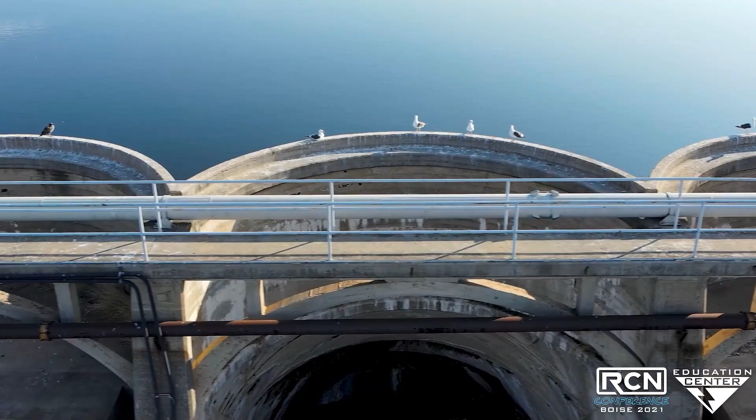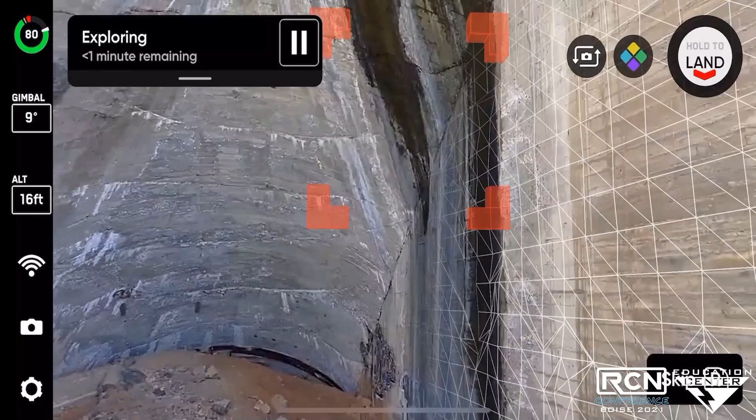The scope of the project was to create a digital twin or reality mesh to complement 3D model where we're going to leverage AI. So we took the orthomosaic imagery that we had from the reality mesh, popped it into Neurala Brain Builder, which is through a web portal. How many of those different assets there are within that 45 square mile. So it gave us a count, it gave us an understanding.

Well, you could probably guess if you do no remediation that the predictive analytics on it is going to be 3 centimeter growth if nothing changes. And at the end of the day, we're just looking to continue to build the group of users that work with this type of technology, right? Get them more familiar, get them more excited, and make this more part of the day-to-day work that we all do.

Today's presentation is going to be on leveraging reality captured data to solve tomorrow's infrastructure challenges. My name is Carlos Femmer. I'm the Director of Data Acquisition with HDR Engineering. And hi, I'm Cameron Schaefer. I'm our Transportation, Data Acquisition, and Reality Mesh Director.

So we have one slide on HDR Engineering. It's been around for 100 years. Established in 1917, 40 plus countries, roughly about 10,000 employees, 200 plus offices worldwide. Within the data acquisition practice, we have about 125 data acquisition professionals. In 2020, we completed about 568 projects.

And from a core offering, we have artificial intelligence, survey, drones, LiDAR, geophysics. So when we talk about reality capture, the ability to bring in a lot of these sensors, we're going to look at a few project examples. It's pretty beneficial. The first project example that we're going to talk about is Diablo Dam. This is for Seattle City Light up in North Cascades National Park.

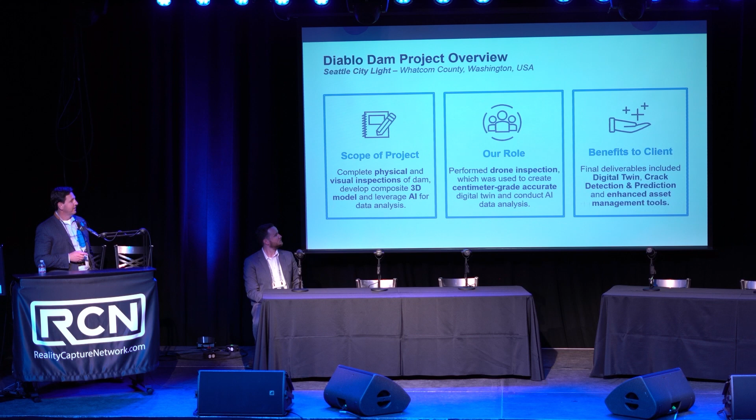Our role was to perform drone inspection used to create centimeter grade accuracy and then use AI for data analysis. And then benefits to the client or final deliverables were digital twin, crack detection, prediction, and enhanced asset management tools.

So if we look at the execution for the project, it's broken down typically into 4 phases. The first phase is inspection or the data capture. We use drones. First we got the survey control from the client. We set up on their survey control, set out ground control points from there, and then did a particular capture technique for that specific dam, because each asset requires a different capture technique to get it the right way.

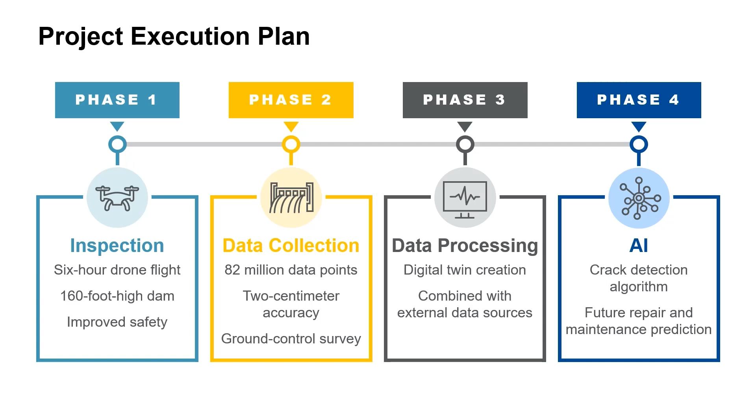The second part was data collection. We ended up with 82 million points, 2 centimeter accuracy of what's stated. It's actually tighter than that. And then ground control. Data processing, we created the digital twin with Bentley's ContextCapture, which is an amazing software piece. And then lastly, we developed some AI to do some crack detection, and it helps out with future repair and maintenance as well.

So the whole goal was to create a living, breathing model, and the first part is high-resolution photography. The next project we'll talk about is where we brought LiDAR in, but in this particular one, we didn't have it. So you have high-resolution photography that's overlapped both side and front to produce the reality mesh and digital twin.

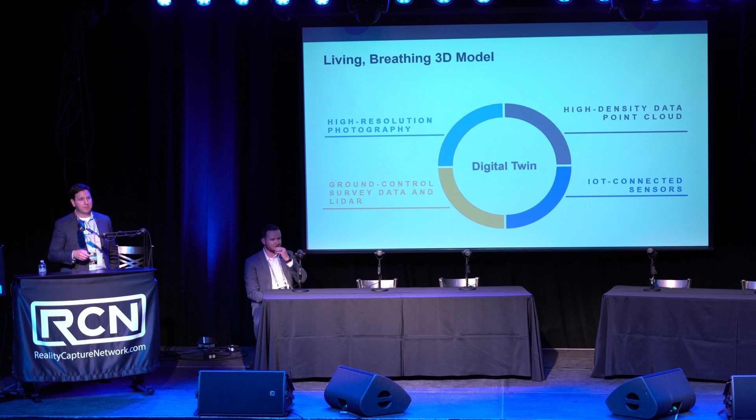The second is the ground control, survey data, and LiDAR. The point cloud, and then in the future, where you can throw in other sensors is where things are going. If you have a baseline and you're adding that same capture year over year, or at whatever cadence is appropriate, some assets might be 2 years, some assets might be every 5 years. Then you add in other connected sensors, that's where you bring a lot of things together.

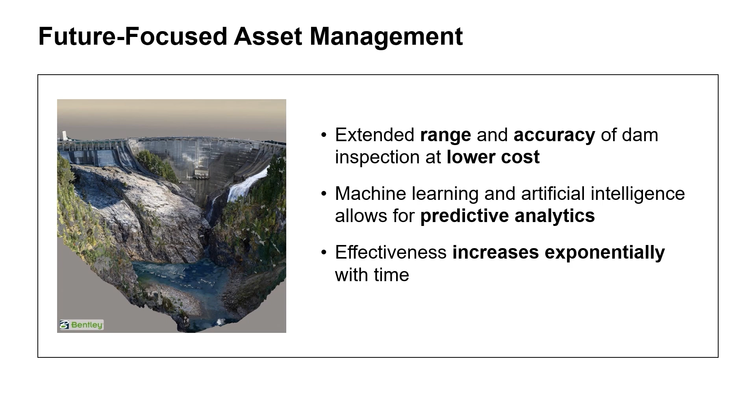So the focus and future is on asset management, extending the range and accuracy at a lower cost. To state up front, we did the rope inspection, but this is a complement. This isn't a replacement for what a rope inspector would do. You can't bang on things with the drone, but what you can do is get a good complement as a tool to a rope inspector where appropriate.

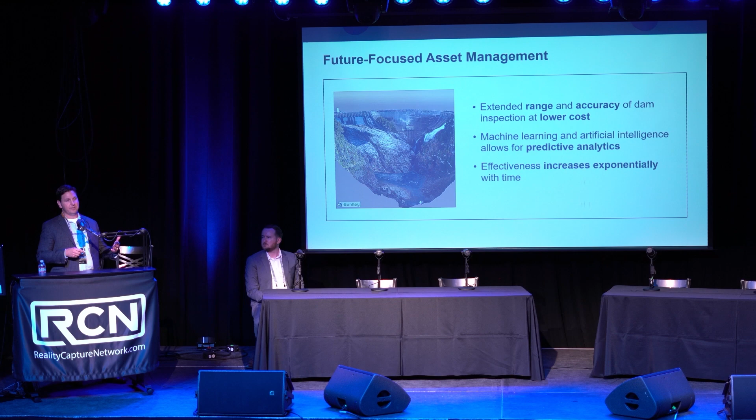If it's just a visual inspection, then it's the right tool for sure. Machine learning and AI, we're going to talk about that shortly too, and the effectiveness increases exponentially with time. And we'll talk about that in a second as well. But a good example is, year 1 you capture it, you see a crack. Year 3 you capture it, and that crack extended by 5 centimeters. And then year 6 you capture it, and it's 9.2. Well, you can probably guess if you do no remediation that the predictive analytics on it is going to be somewhere at 3 centimeter growth if nothing changes.

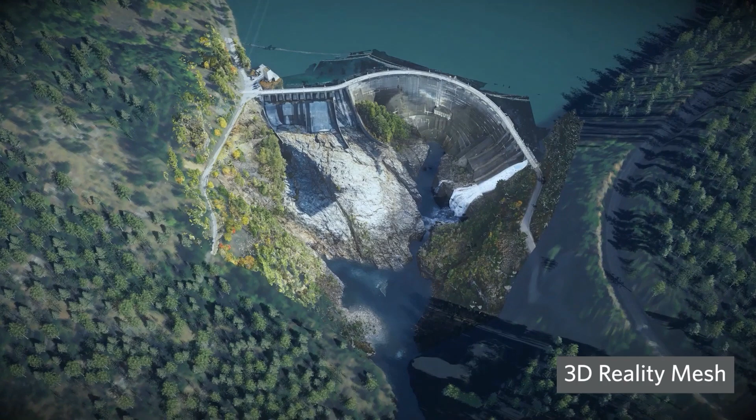But it starts with, so here's an example where we took the dam. This particular project, like I mentioned, was in North Cascades National Park, required a special waiver and permission from the Park Service. It's challenges here. If you look on the right, we requested that all of the spillways be shut off. They weren't able to for that time of year when we're on site.

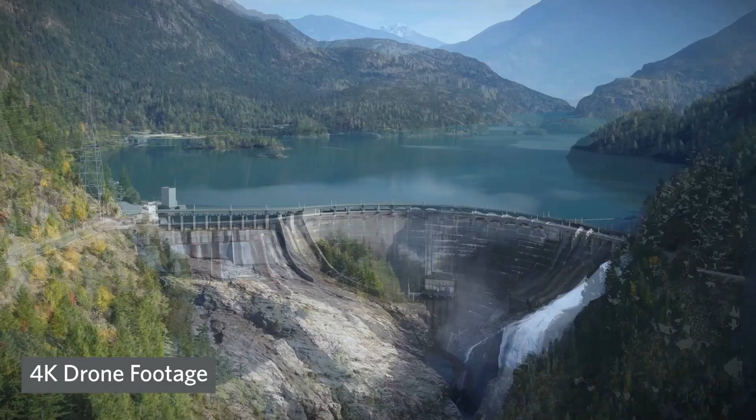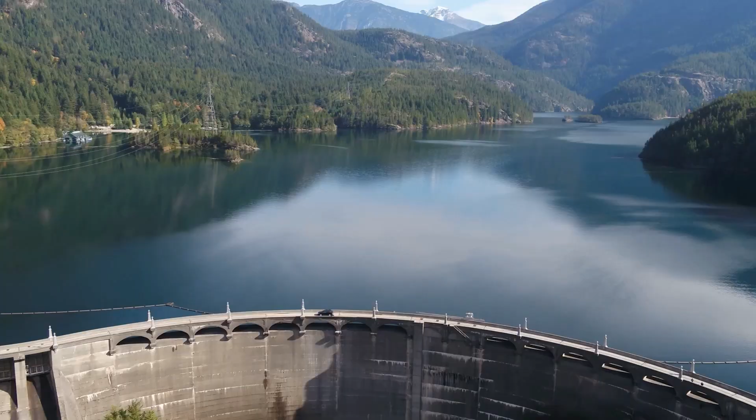So we had to get creative and say, if you look at it, if you're doing photography with a drone, that mist is going to give you this artifact in the cloud. So we were able to work with them to say, you can't shut it down, but can you just close it to like 2 inches? And that eliminated a lot of the mist.

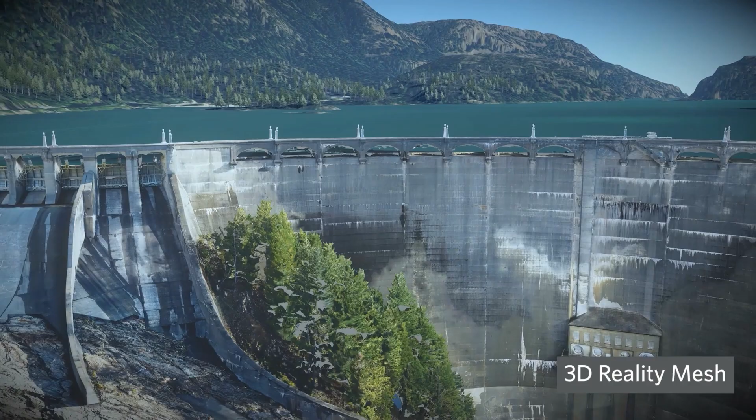And beyond that, we had to adhere to launching and taking off from property. We set the survey control. But I think the end result was phenomenal when you look at the results. I think we did an interview with CNET that published this as well, and we had some good feedback from that along the way.

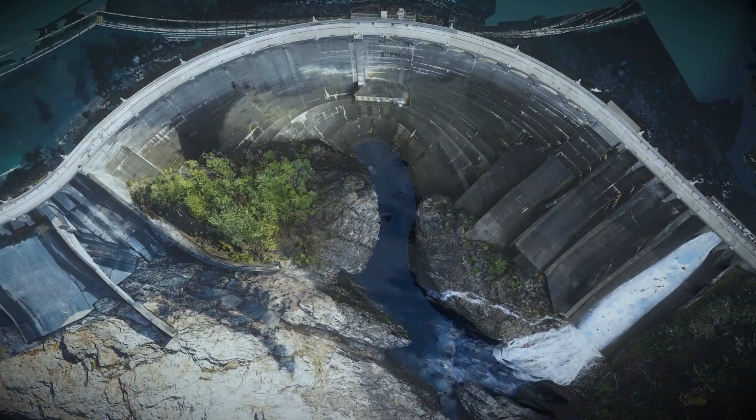So we'll talk about AI, and we keep it simple. It's 3 buckets. AI is when a computer can do something that requires intelligence by a human. Machine learning is a subset of AI that uses algorithms to train machines to perform tasks intelligently. And then deep learning is a subset of machine learning where neural networks learn from vast amounts of data. So if you hear these 3 terms, they're typically talking about one, but one fits inside of the other that fits inside of the other as well.

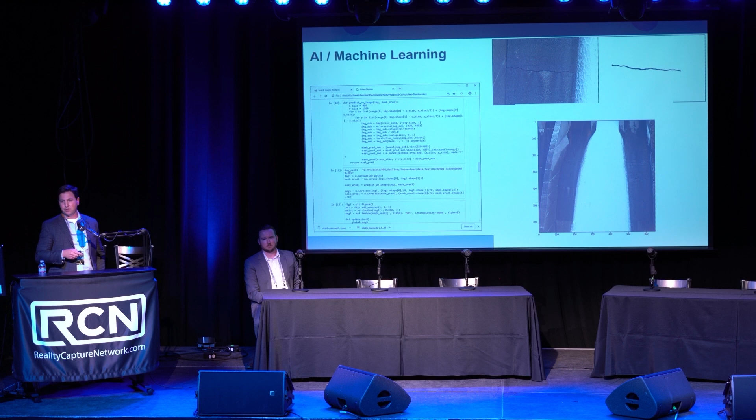Kind of here, how does it work? At a high level, we took thousands of pictures and you train the data to say, what is a crack? So you throw in the raw data, and then if you look at the top right, there's your output, and that just iterates over images. So 2 ways to do it: let the machine do it, or let somebody take the image and try to find those themselves.

Kind of how it works as a workflow, so what's cool about it is when you take the drone and you put in your parameters, it's going to capture everything on your SD card, all the images you collected. You take that, do a little drag and drop action into a folder and say iterate over all these folders, and then you train the data, you refine it in time, and then our secret sauce, we feel, is we're not inspectors. So having the inspectors do the training of it is what's important, and we'll talk about that here shortly too.

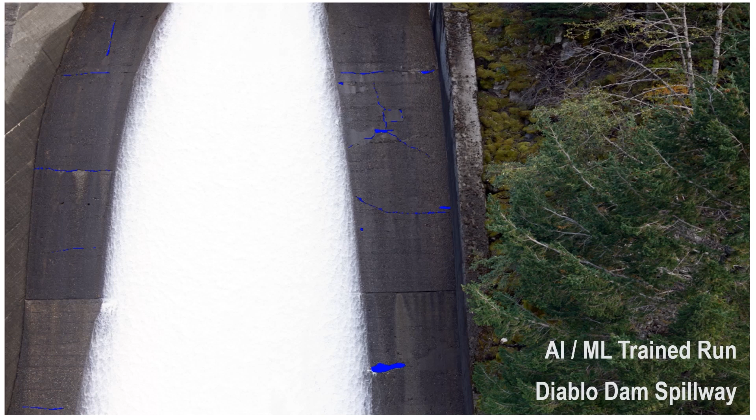So there's a video that plays here, but on this video, the inspector would go in, they would delineate what the crack is, what's not a crack, and that teaches the machine, this is a crack, right? And then here's a result. We tried to get creative at the beginning and say, well, instead of creating our own algorithm, why not find it in the public domain, off the internet? So we did that. We found a public data set for roads, and we applied it to this, and what you can tell is it did pretty good.

Coming back to the left, you'll see cracks and you see spalls. It found cracks, but it found cracks in trees, and it found none of the spalls. And then whenever you dial it in and train it and run it again, it finds it. So here's a close-up of it. This was the public domain. The cracks did decent. But whenever we trained the data set and ran it, this is what it found, and that's kind of the end result. You want it to assist you. So imagine doing this for thousands of images.

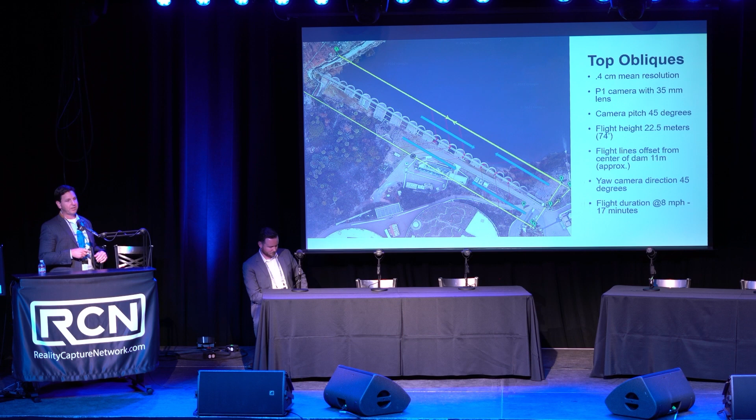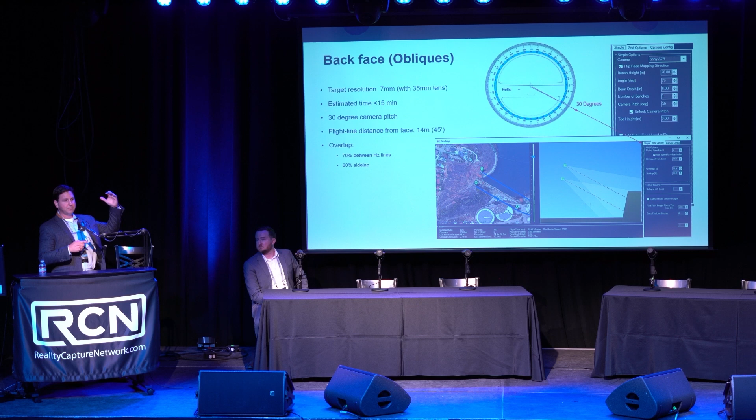Next, you want to have your obliques, and the certain technique is you want to have your conditional yaw. So I want to capture 45 this way, 45 this way on both sides of it. That captures your top. Coming back to here, now I want my facades. So I'm going to have a 30 degree, and you're going to capture that. And again, dependent on how close you want to be, you want to be the right distance to where if you're saying I want a 0.4-centimeter accuracy model, then your top, obliques, facades all need to be the same resolution.

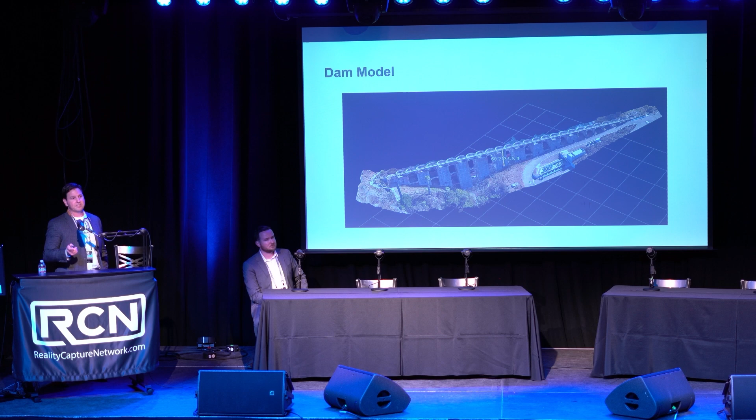And then on here, we actually captured LiDAR as well. This was a complex project. Numerous scans. I heard presentations before where you talk about shadows. Same scenario here. You want to make sure you paint it and you get all the data that you're looking for. So after we painted it with numerous scans, we ended up with over 1 billion points. We had RTK, Trimble R12 out there. We used an SX12, and then we used the X7 inside the bay. So we used 3 different LiDAR systems to get the data that we were looking for. So a little over 1 billion points.

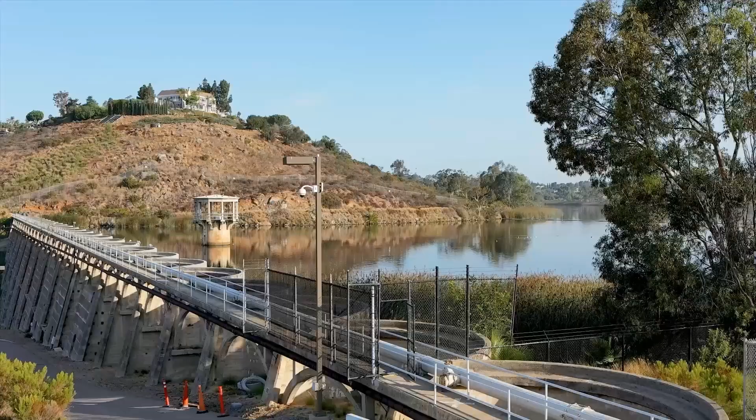Yeah, so this video is playing. So here's what's here on the left. You have your external bays, your facades, and then every one of those facades there has an internal bay. So as big as it is outside, it's just as big on the inside. And then on the back side, you have 100 feet of water on the upstream. That kind of looks at it, as we're coming across the top, just to show the picture.

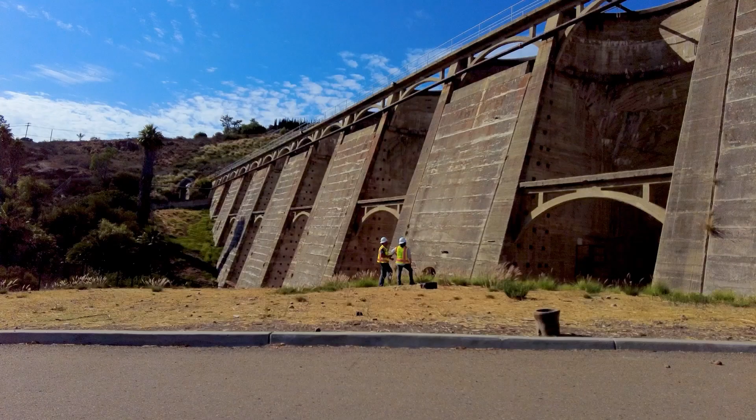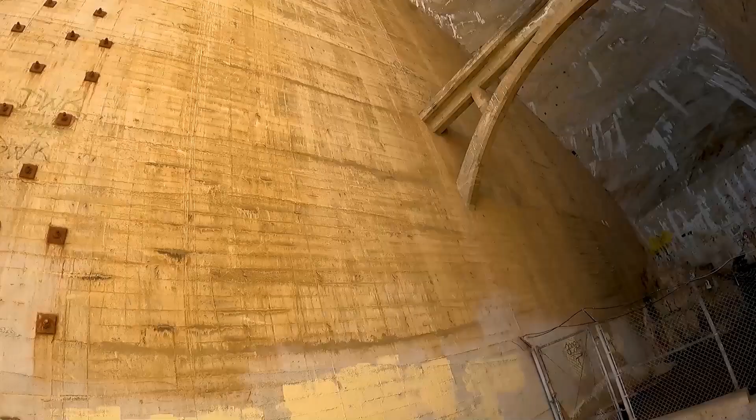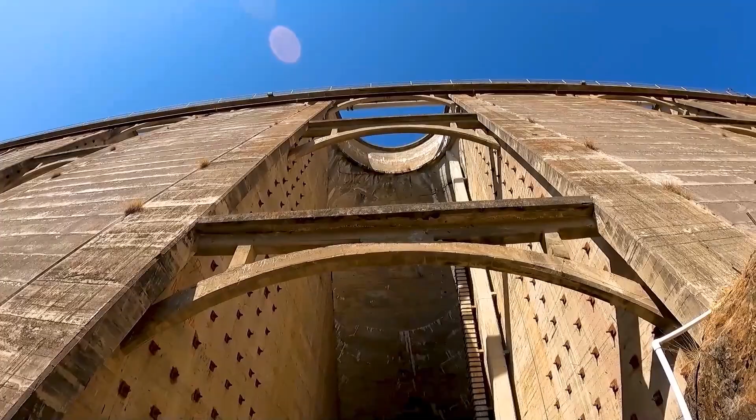There's the Matrice 300 RTK with a P1. Up at the top, you can't see it, but that's a Skydio flying. And we used that for the internal bays because we're going to be going in without GPS. And this is what it looks like. So I had a GoPro on my head and looking up, and it's just massive. So the flight over doesn't really do it justice. And you can notice the depth, and you have these columns, and we need to map all of it inside and out. What's cool about, like on the Skydio side, is going out and,

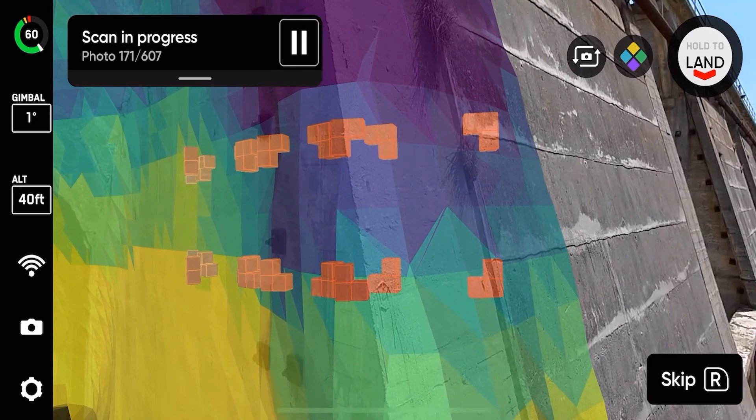the challenge here is the drone can't see water. If it sees water, it's going to go in it. It thinks it's open space. So we have to limit the floor, limit the ceiling, and then capture this. This particular data was at 1.3 millimeter resolution.

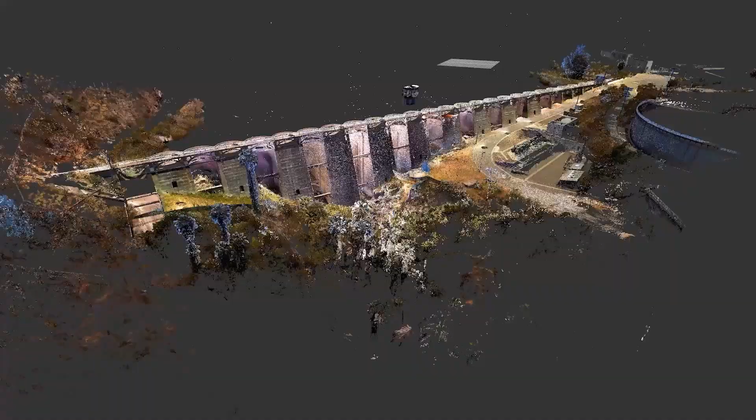And the LiDAR came in great because when you're doing a drone reality capture and you're laying ground control points, that's cool and all. But what happens whenever you have a 110-foot wall and you need to get control points there? So we have to create wall control points, and we pull that out of the LiDAR data. So that was another kind of a trick that we ended up having to leverage to pull that together.

So between the 2 projects where they achieved plan, capture, deliver, we wanted something repeatable, consistent, produce a comprehensive data set, develop composite maps to be able to use for inspection planning, and now we found some benefit on geological assessments and geotechnical as well. Future, hydraulic modeling, change and anomaly detection, GPR leakage. There's some things that we're incorporating now that's just continuing to build on it instead of staying static. So that's kind of where the future's going here as well. In a nutshell, project outcomes: improve safety, time and cost savings.

Accuracy was impressive. We had the LiDAR data and said, okay, well, how does the drone photogrammetry and digital twin compare when you're measuring, and it measures and compares very well. Asset management, long-term digital twin that can evolve over time.

So just one last comment here: the big takeaway is you have to have good survey control. We found tremendous benefit of having the LiDAR to put wall control points that ensure that all of the data was really tied in. And then having the artificial intelligence as well, where it can be a helper to show things. What it found compared to what we would manually do was impressive as well.

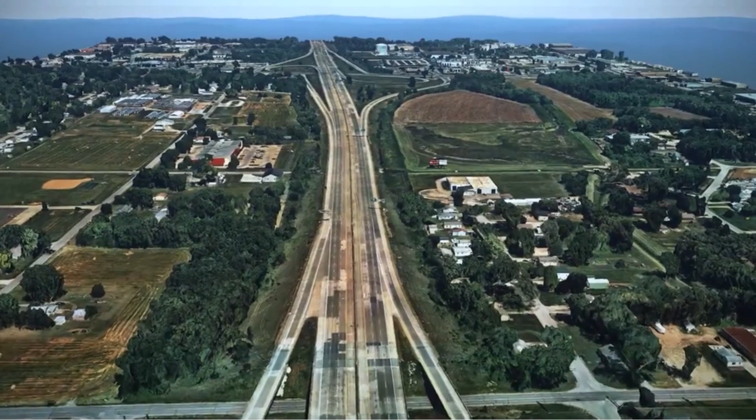First, with the Iowa DOT Integrated Corridor Management Project, this came out of our transportation planning group, and we really wanted to use Reality Mesh and see how far we could push it. We identified this as a pilot project to see how we could help inform what was needed for their specific purposes.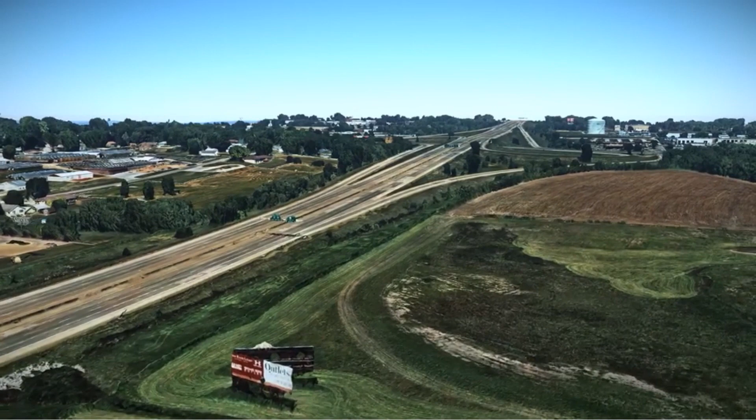So the first thing they needed was just a Reality Mesh for visualization. Easy, right? We'll give it to them, we'll let them generate fly-throughs. They took this and generated proposed models, put that over their design, win right off the bat. Then the team came back to us and said, hey, can we use this Reality Mesh to identify different classes of interest of particular assets? And we said, yeah, we think so. What are you guys looking for?

So we sat down with roadway engineers. They came up with 11 different classes of interest that they were interested in finding over this 45 square miles of area for the corridor management study. So we took the orthomosaic imagery from the Reality Mesh, popped it into Neurala Brain Builder, which is a tool that allows for fast labeling and training of your data set through a web portal. We had 8,500 raw images to start with, and we trained 200.

What you'll see here are those 11 different asset classes: the roadway medians, barriers, crash barriers, signs, drainage inlets, and so on. We trained 200 of those photos, and then dropped all 8,500 individual images into the code repository that resulted from this task. That left us able to overnight process all 8,500 images and understand with an actual confidence interval how many of those different assets there are within that 45 square miles. So it gave us a count, it gave us an understanding.

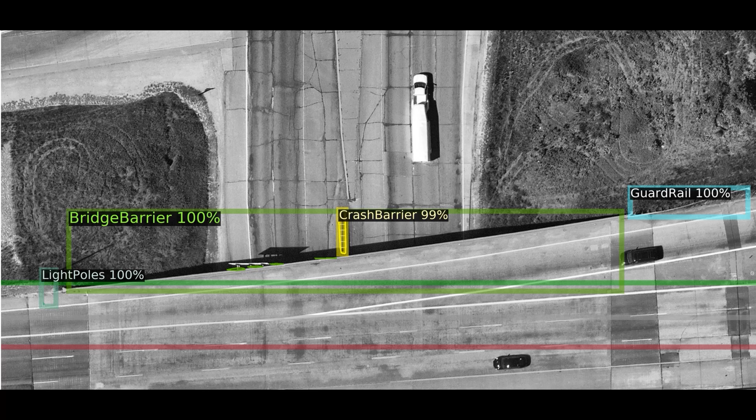So we took the resultant XY information from the images, and we overlaid those on the RGB point cloud data that we had for those 11 asset classes. From there, we got those different assets like the lane striping, like the continuous yellow striping here, and used that information across all 11 asset classes for that 45 square miles to ultimately deliver a conceptual level topographic surface that the team was able to use for their preliminary planning. So it's an interesting case study on the highway side of what we're able to do with artificial intelligence and computer vision from the photo side.

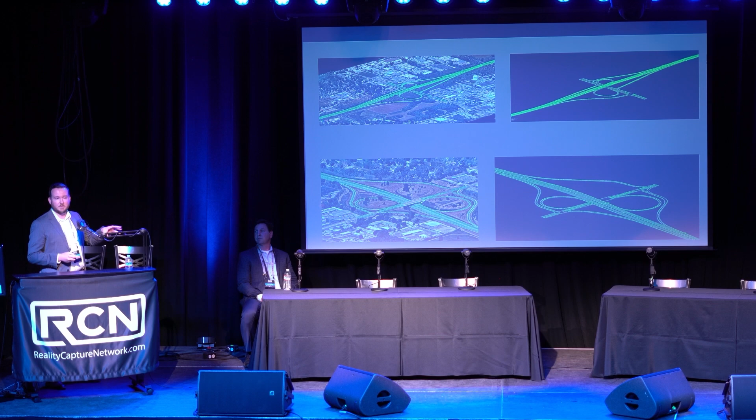At the end of the day, when we compared what a conventional workflow might have looked like with this amount of data, for that 45 square miles of point cloud, we're looking at 850 gigabytes. That's something our team doesn't know how to use. No one person has a computer that's going to be able to leverage all that. When we filtered it down by asset classes and converted those to PODs for MicroStation use, we're looking at just about 425 megabytes per asset class. So this really helped the team make sense of this really large data set, find the information they need, and get it in the right format to integrate within their native design platform.

I'm going to talk about one more project, same kind of concept here, asset identification through artificial intelligence. But this one's unique, and I kind of classify it as a beta at this point, but I think it's fun to share with this group of individuals here. So this is our Ontario Line subway program in Toronto, Canada. This is the largest project that HDR has had to date. It's 16 kilometers of a brand new subway line, $11 billion worth of construction value.

From a reality capture standpoint, when we look at the amount of data that we're dealing with to date, and we're about halfway through, we've captured just about 15 billion points above ground and below ground for this project. We've got just about a 20 square kilometer reality mesh for the entire site. And we are integrating our LiDAR and our reality mesh as much as we can within the Civil 3D, Revit, InfraWorks, and Navisworks platforms, being that this is an Autodesk designed project.

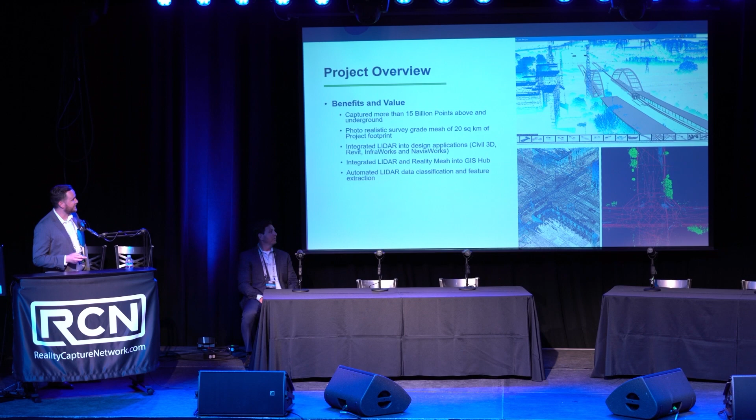We're bringing that same information into Esri, into 3D Scene. So we want to make sure we can distribute and allow our team, our client, even the public in some cases, to be able to visualize this data. And then what I want to quickly feature here is a new tool we've been working on, which is the automated LiDAR data classification and feature extraction tool. I'm not going to go over all these individual steps, but Carlos talked about the process on Diablo Dam. Very similar process here.

The only difference is that we're actually running the AI on the point clouds themselves. It's not on actual photos. So we're starting with that registered LiDAR data. We're creating a training data set. We're selecting features that we want to classify on, and then we're improving, right? We're iterating. And at the end of the day, we've got it to a point where the training data set's created. We're using supervised ensemble learning, and we have automated detection of vegetation, power line, rail, manhole drainage, and just about 3 other asset classes.

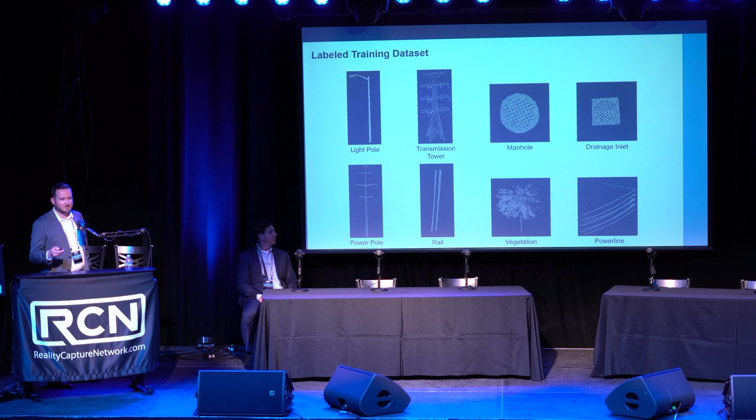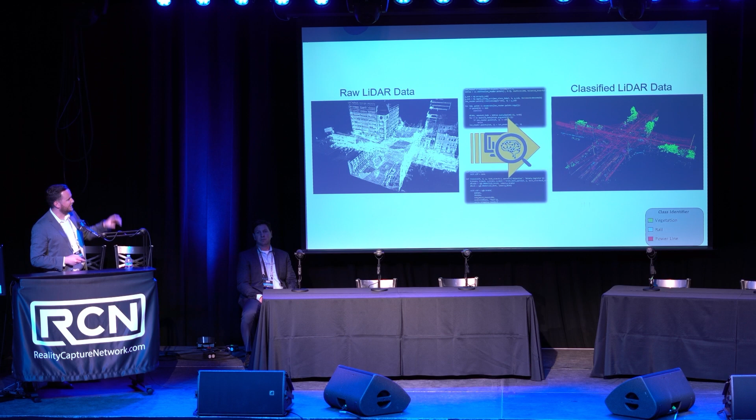So I'll show it in a second here, but this is a tool we're looking to continually develop. As you get more data, your training data sets get better. You're able to identify more asset classes and improve on what you're able to deliver. So here's a couple examples of the type of training data set that went into this, right? So you're looking at light poles, transmission towers, and so on. And at the end of the day, we're taking that raw LiDAR data, running it through our ensemble learning code, and then what you get is that resultant classified LiDAR data that you see on the right.

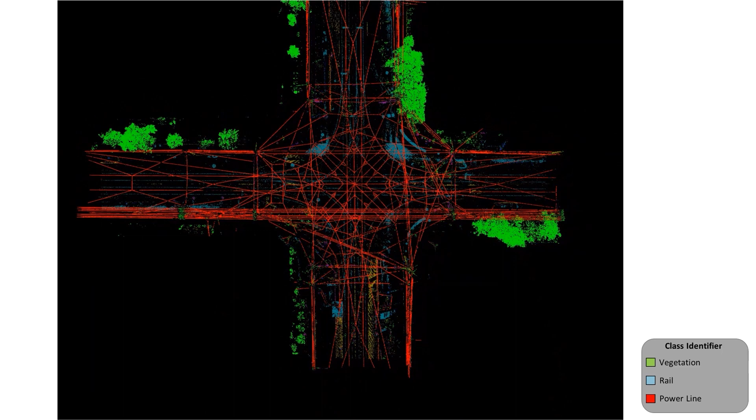So just to show from a more visual perspective, from the raw, in this case uncolorized, data, you're looking at what we're able to get preliminarily here: just vegetation, rail, and power line. And similar to what we're doing with the Iowa project, this is really helping to work with our design teams and get them just the information they need in a smaller file format. And then we're also using this for different asset management use cases, for an understanding across that entire 16 kilometers of mobile, terrestrial, and aerial LiDAR that we have. What are we looking at in terms of assets, and how are those going to change over time because of all the new construction that's happening with this project?

So with that, I want to keep it quick as Carlos promised, and wrap it up here with the end results of this LiDAR data classification. Utilization for identification and tracking of our assets. That's what we're primarily targeted for with this tool right now, through the automation of segmentation by our defined asset classes. And at the end of the day, we're just looking to continue to build the group of users that work with this type of technology, right? Get them more familiar, get them more excited, and make this more part of the day-to-day work that we all do. So wider adoption of point cloud data for our targeted disciplines and teams we're working with.